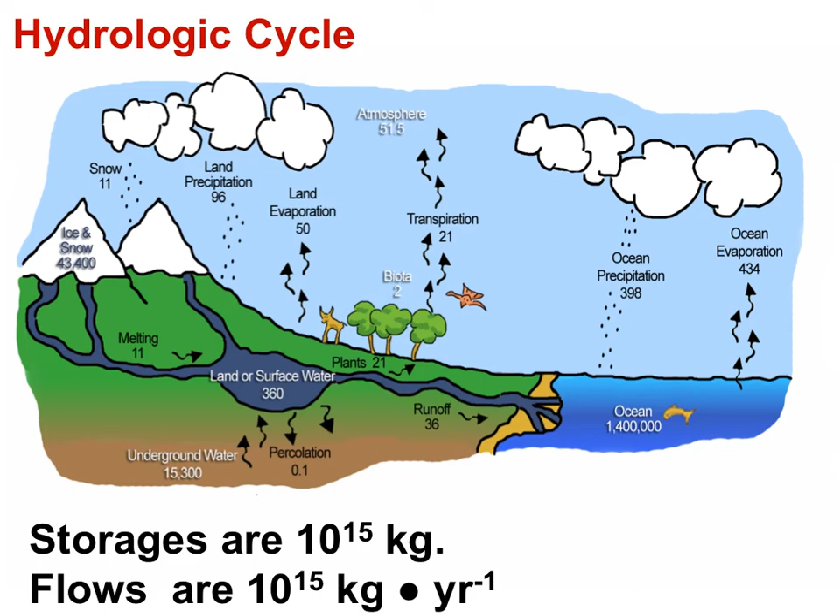All the fresh water that was available to humans 10,000 years ago is still here with us today. So why is it that fresh water feels scarce? Why would societies need to strengthen freshwater supplies? Population numbers have increased, putting stress on existing freshwater storages, especially in desert regions. As well, people have polluted most of the existing surface water storages. So here is the IB syllabus statement that drives this movie start to finish: describe and evaluate water enhancement measures that provide for increasing demand for fresh water.

China has numerous water redistribution plans from the wet southwest to the dry northeast, from places with higher water availability to regions of lower water availability. In this slide, you can see the Yellow and the Yangtze rivers in blue, and the redistribution projects in red. These projects are very expensive.

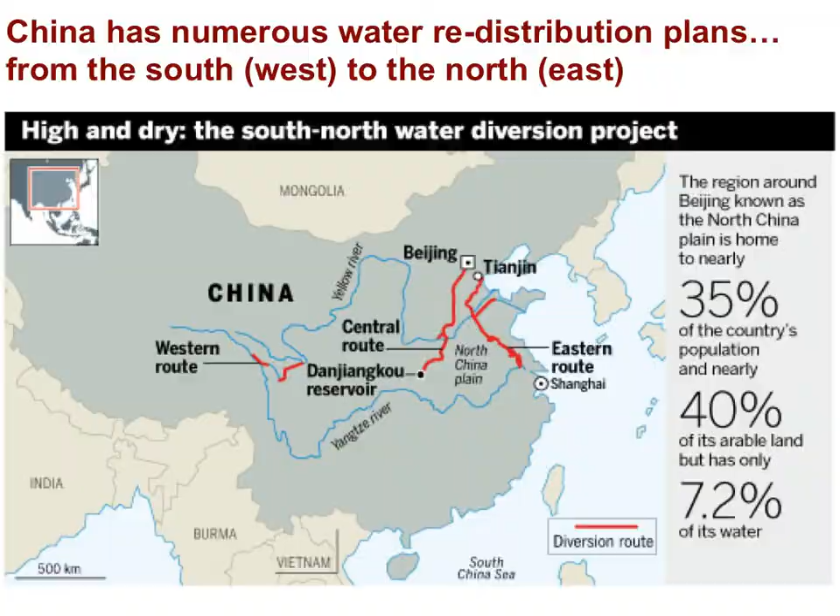China would like to redistribute water from the Brahmaputra River on the Tibetan Plateau to northern China on the Yellow River, a much drier region. A project like this requires technological expertise in addition to the expense.

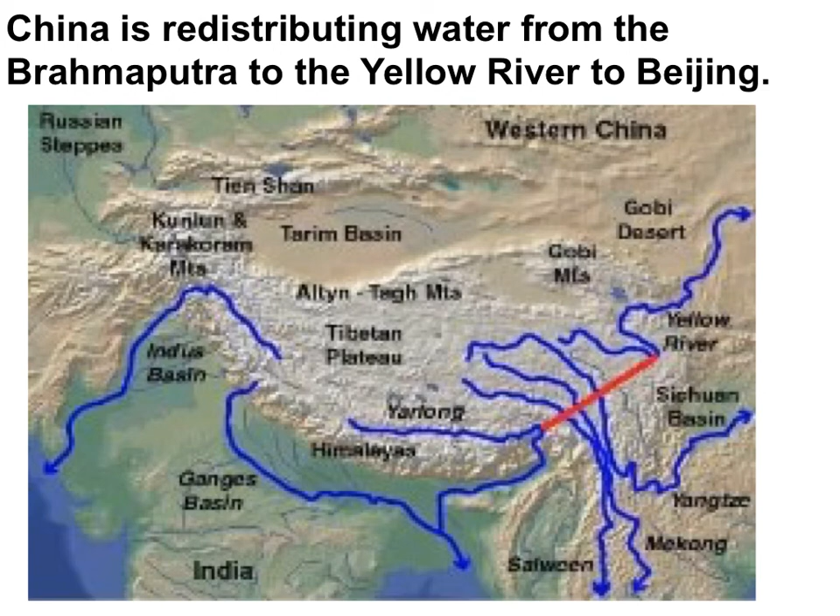Canals redistribute water from the Colorado River to arid cities such as Phoenix. The withdrawal of water from the Colorado changes the magnitude of the Colorado River as a storage, and it also changes the biodiversity of the river.

Now, can you evaluate the redistribution of water as a strategy to enhance water supplies for people? Stop the movie now or follow along with me. I've stated the strengths and weaknesses in previous slides. I'll let you study this slide on your own, although I'll quickly run through it. Stop the movie to take some notes.

The strength of redistribution is that it moves water from places with an excess to places with a deficit of fresh water. Weaknesses: it's expensive, requires specific technology, there is a loss of water due to evaporation from the surface of the canals, and there are changes in the ecology of the river. There's a loss of diversity.

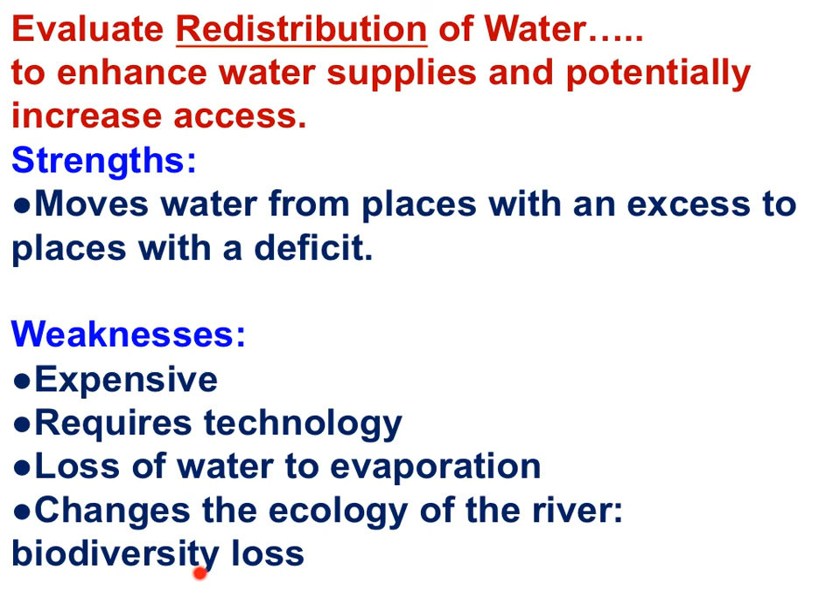Now, let's look at reservoirs as an enhancement measure providing for the increased demand for fresh water. Urbanization and the increased need for agricultural irrigation has increased the demand for water. Dams hold back large volumes of water for irrigation and household use. Dams are expensive to build, and the ecology of the original river is dramatically changed.

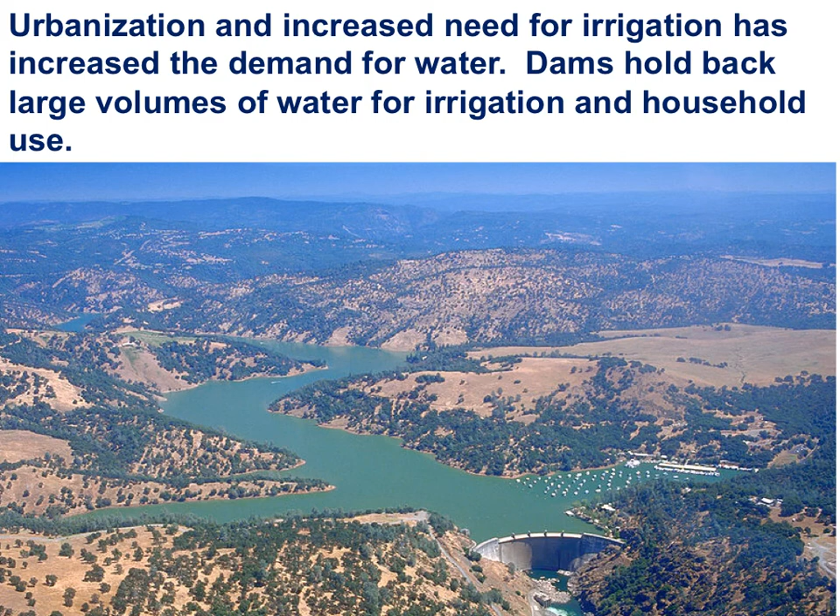Dams do provide water for people who need it, but dams also provide electricity, also known as hydropower. When the Three Gorges Dam was built, more than 1 million people were displaced from the river valley.

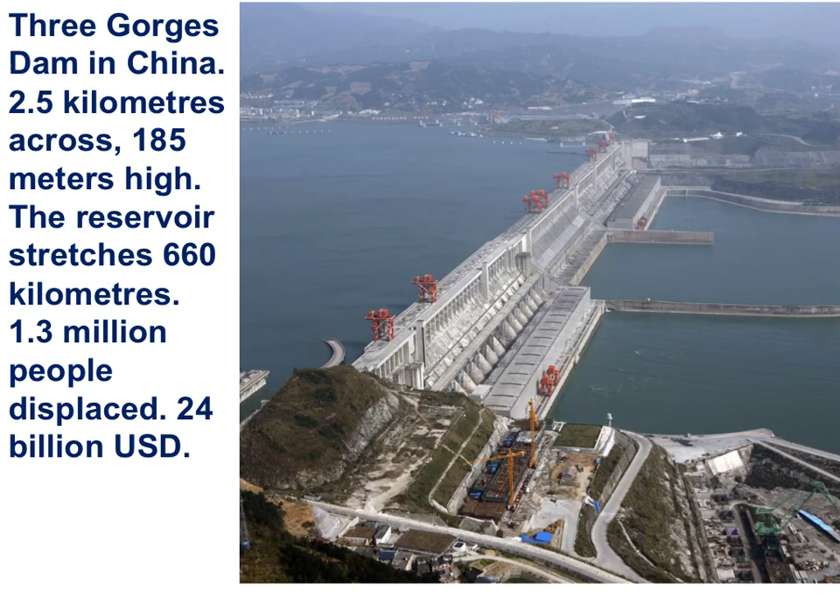Dams hold water back for household use and agricultural irrigation. Dams also provide hydropower, and the lake behind the dam provides recreational opportunities. Dams are expensive to build, and they have a finite lifetime. Silt fills in behind the dam, and the water held behind the dam is not endless. If the river ceased flowing, the water held in its reservoirs would last 3 to 4 years only.

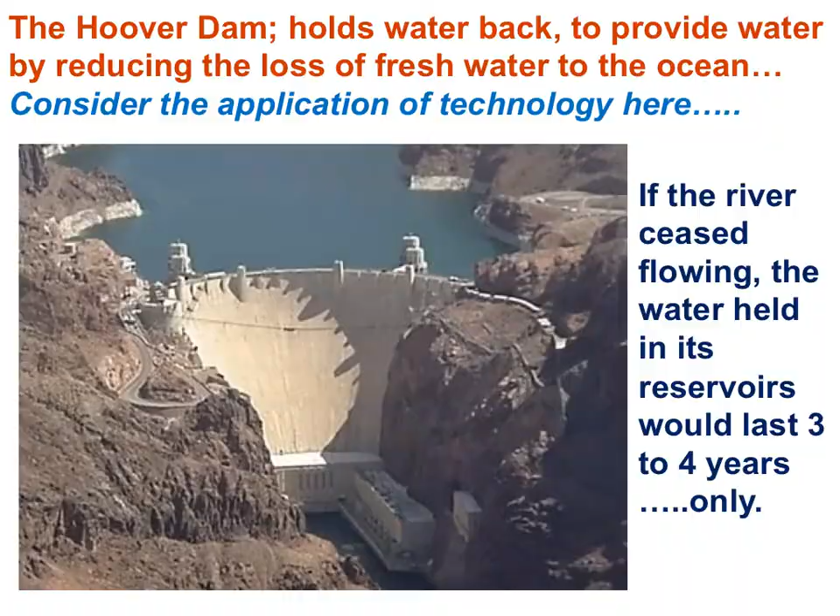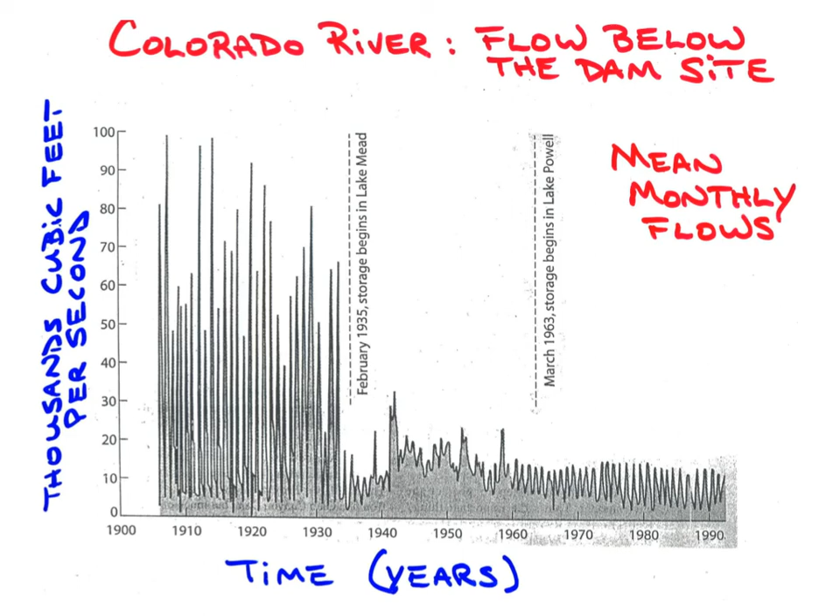In this graph of flow volume in the Colorado River over time, you can see that the flow rate varied widely before the Hoover Dam was built in the early 1930s. Once the dam was built, flows downstream were quite regular. Dams reduce the probability of flooding downstream and make the water flow quite predictable.

Desalination plants are expensive and require high technological expertise. Desalination plants must be located near an ocean.

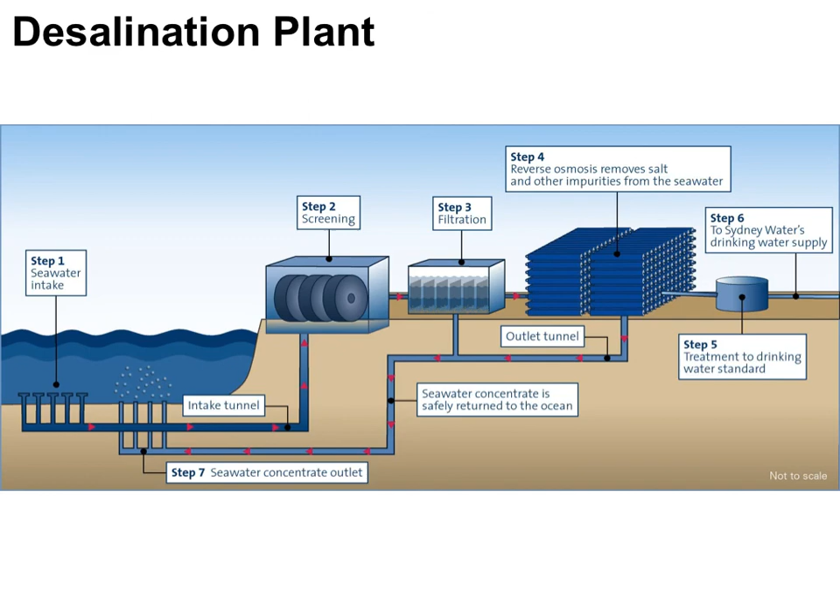Desalination plants are expensive to operate, requiring high quantities of fossil fuel to distill the fresh water from the salt.

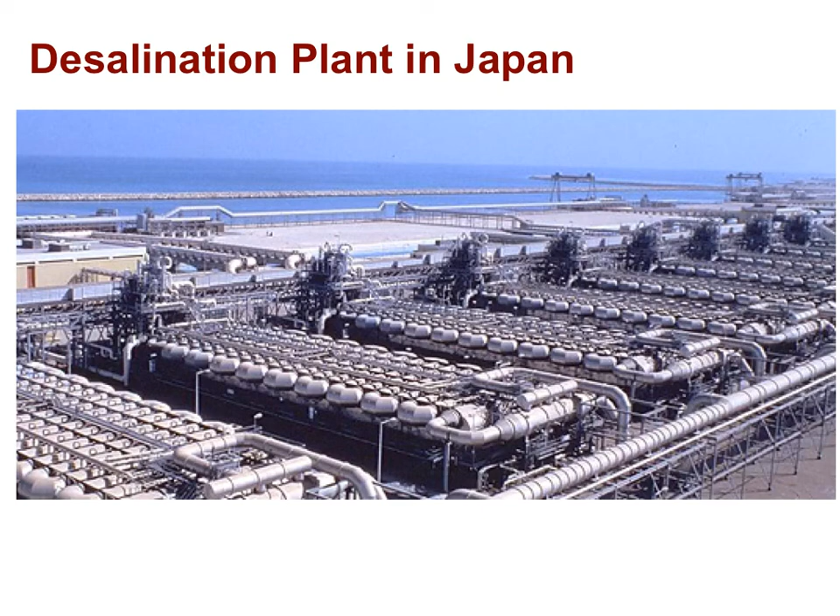Can you evaluate the desalination of water as a strategy to enhance water supplies for people? Stop the movie now or follow along with me.

I've stated the strengths and weaknesses in the previous slides. I'll let you study this slide on your own. Stop the movie to take some notes.

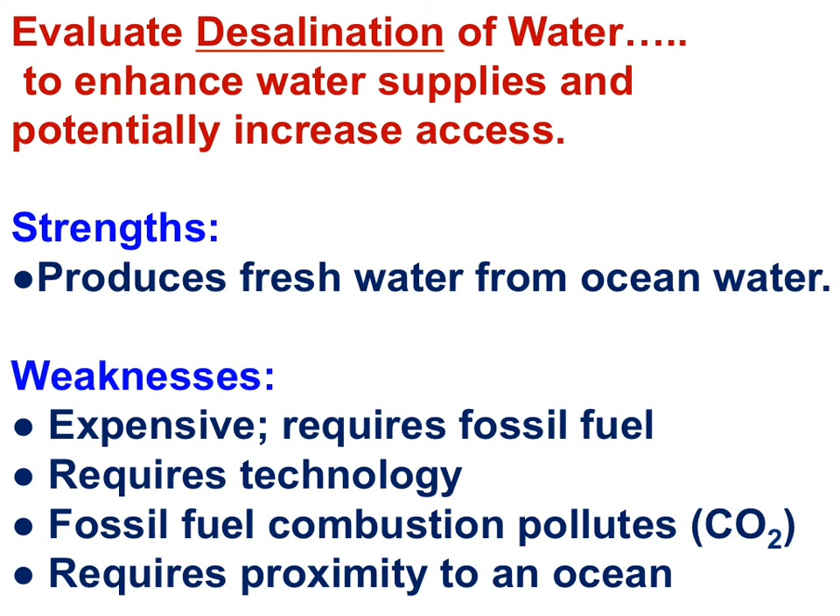Now let's look at the artificial recharge of aquifers as an enhancement measure providing for the increased demand for fresh water. The artificial recharge of groundwater aquifers is the process of purposefully moving water to underground storages. This is a process of recharging groundwater storages by injecting water into the storages in the ground. This would help maintain groundwater natural capital.

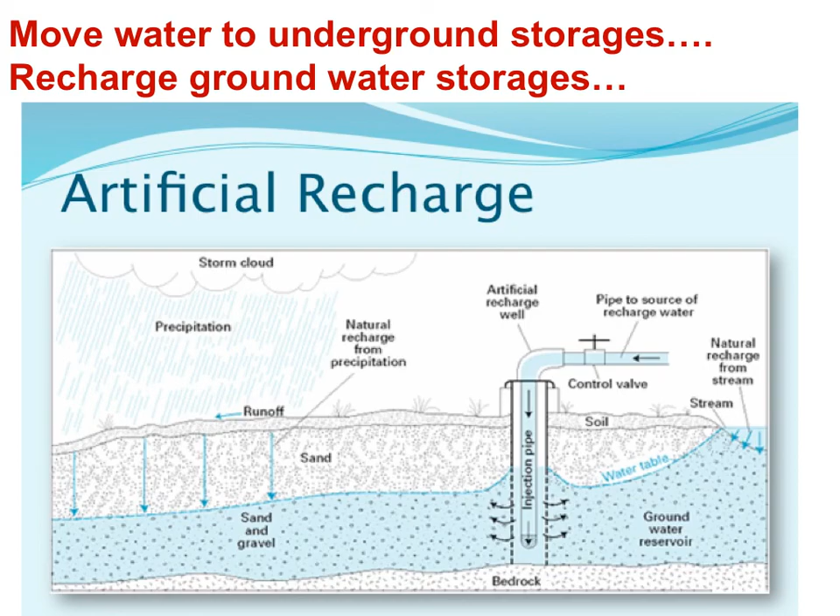Groundwater recharge is a process where water moves downward from the surface into groundwater. Recharge is the primary method through which water enters an aquifer. The recharge occurs both naturally, through infiltration and percolation as part of the water cycle, and through anthropogenic processes known as artificial groundwater recharge, where rainwater and/or reclaimed water is injected into the ground.

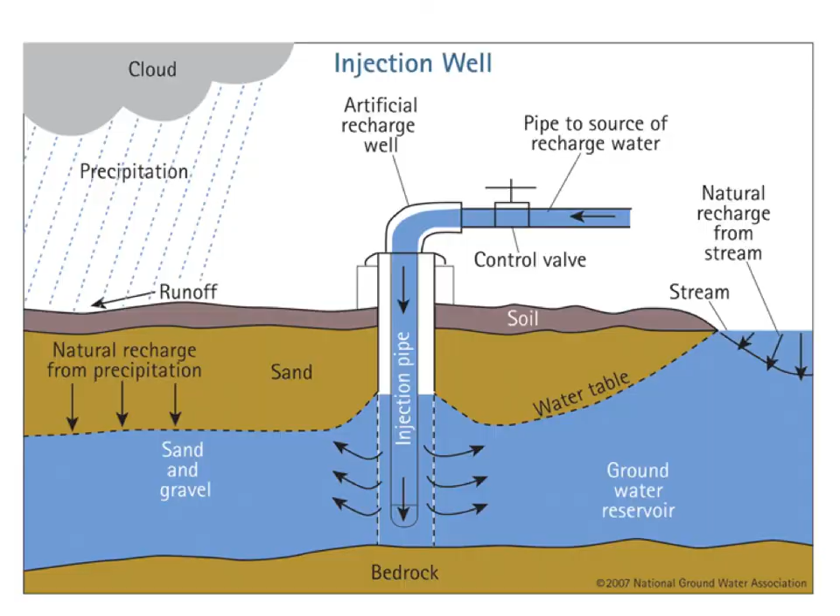Groundwater recharge often requires technology in the form of tubes, pumps, and tanks, and this could be expensive. Groundwater recharge requires land area, as you can see in this image, for taking up the water and letting it percolate into the aquifer. But the solution is really potentially a low-tech solution, nothing more than land area that allows for the percolation of rainwater into the aquifer.

The question is, is the recharge input equal to the output, the use? Where is the source of the recharge water? Is there enough recharge water to make a difference in groundwater levels?

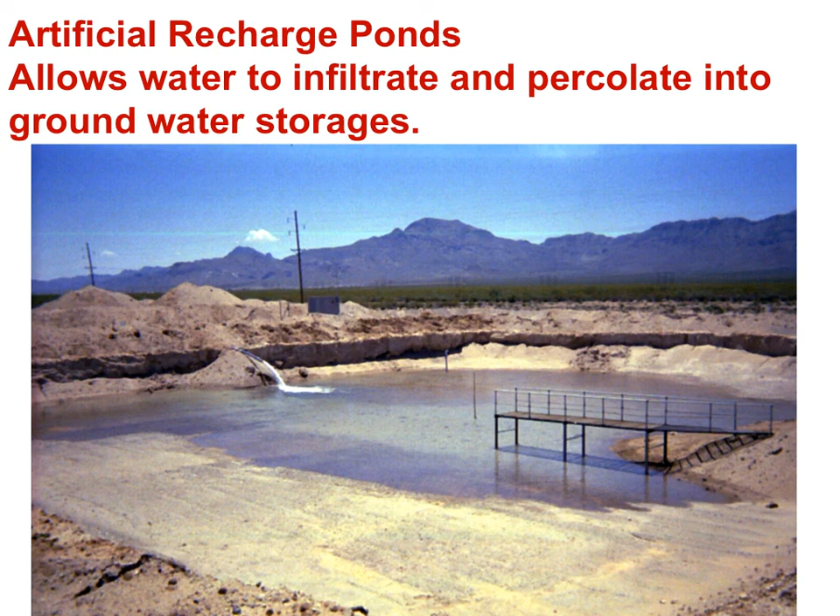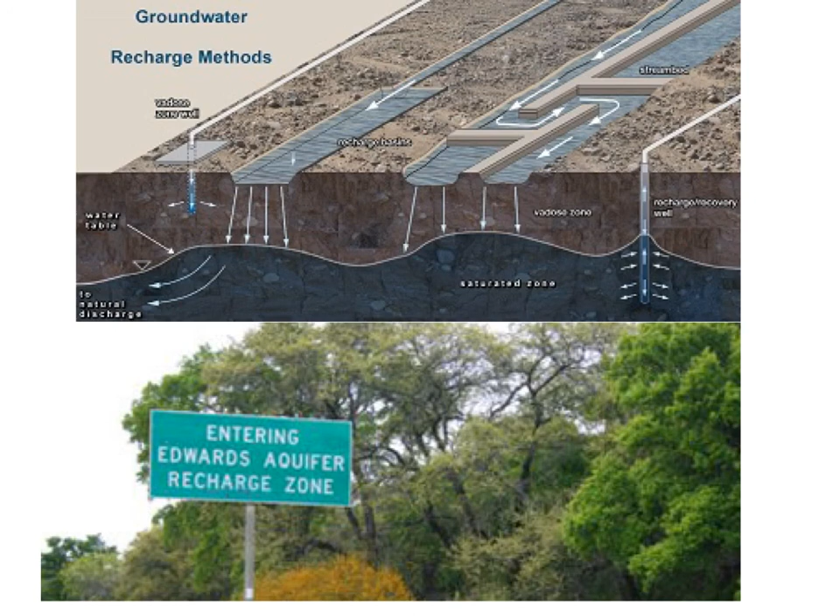You can see in the upper image the role of technology in groundwater recharge, and you can see the significant surface areas that are required for artificial groundwater recharge.

Can you evaluate the artificial groundwater recharge as a strategy to enhance water supplies for people? Stop the movie now or follow along with me.

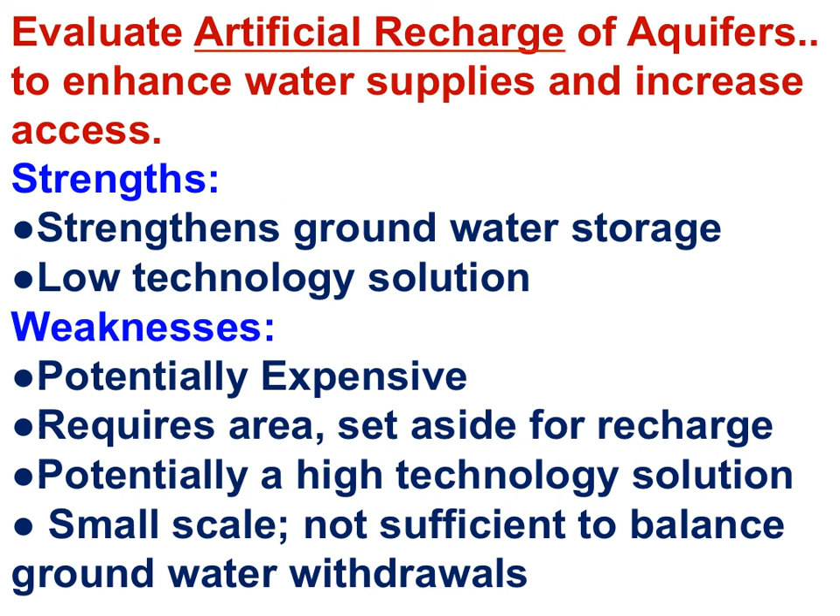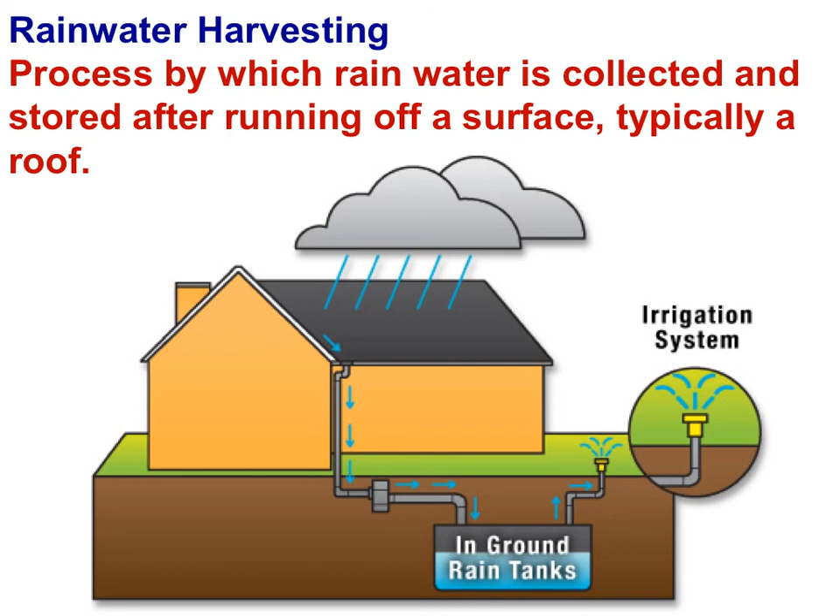Now let's look at rainwater harvesting as an enhancement measure providing for the increased demand for fresh water. Rainwater harvesting is a process by which rainwater is collected and stored after running off of a surface, typically a roof.

Rainwater harvesting tends to be a small-scale, low-technology, inexpensive solution to water access. The water collected by rainwater harvesting can supplement the water provided by the government or the local well. One question is, is the collected water safe to drink?

The technology involved in the collection process of rainwater can be more sophisticated than one might imagine. Is the input sufficient to meet the demand? Does the input vary seasonally?

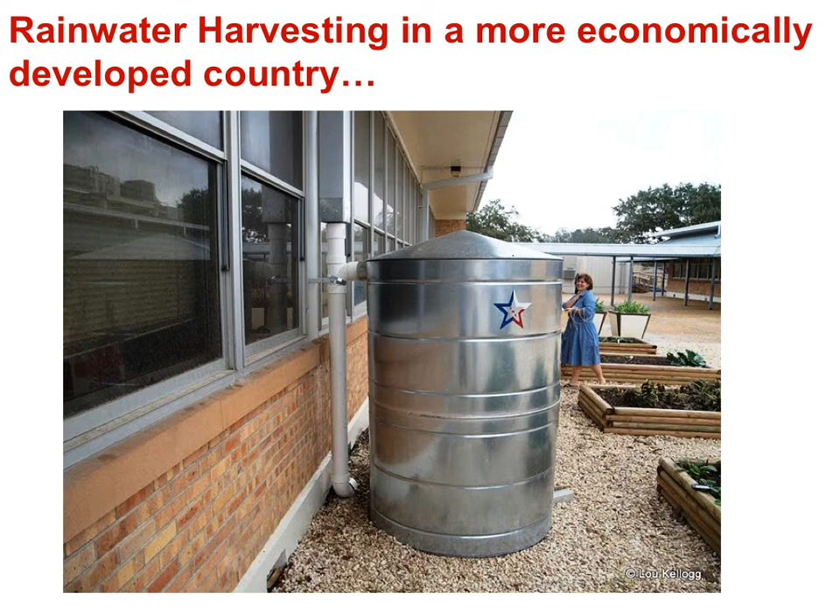Rainwater harvesting is a small-scale, low-technology, inexpensive solution to provide fresh water, to supplement the fresh water that a family might have. Is the input sufficient to meet the demand? And does the input vary seasonally?

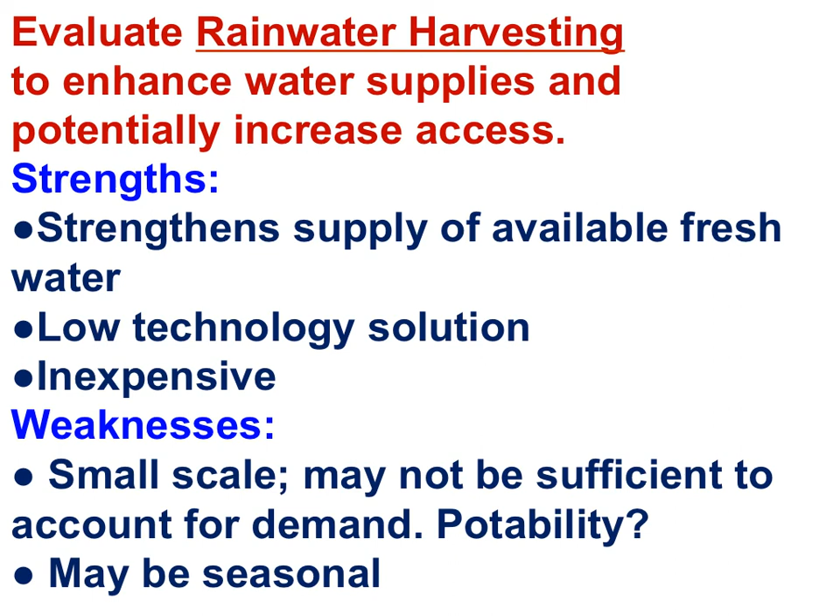I've stated the strengths and weaknesses of rainwater harvesting in the previous slides. I'll let you study this slide on your own. Stop the movie to take some notes.

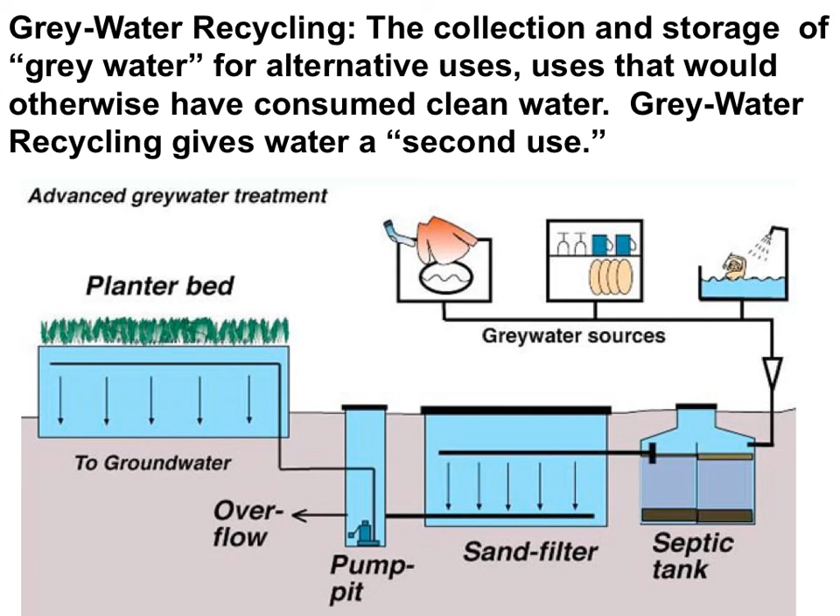Let's look at gray water recycling as an enhancement measure to meet increased demand for fresh water. Gray water is water that is not fully clean, having been used for washing clothes, dishes, or bodies. It can be stored, filtered, and reused, for example in this planter bed. Gray water recycling is the collection and storage of gray water for alternative uses that would otherwise consume clean water, giving it a second use.

Gray water is water that has already been used for washing clothes, dishes, or bodies. Gray water recycling is a low-tech, inexpensive solution to collecting and storing gray water, giving it a second use, for example in this planter.

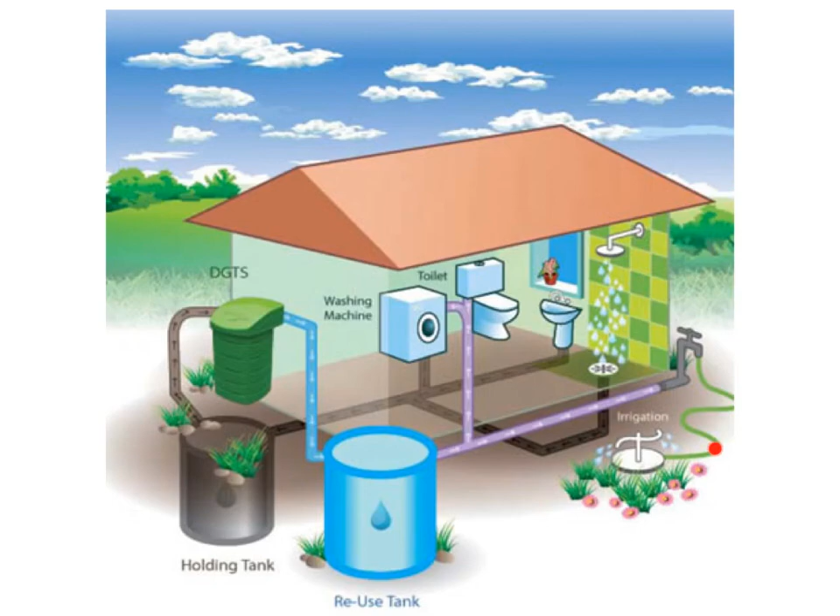Gray water recycling can involve sophisticated technology to ensure collection of wastewater from the home, but it doesn't have to be as sophisticated or expensive as this image implies. Moving polluted water through a sophisticated tank with microbes and sand or gravel beds can clean the water, and this kind of technology can be used with gray water.

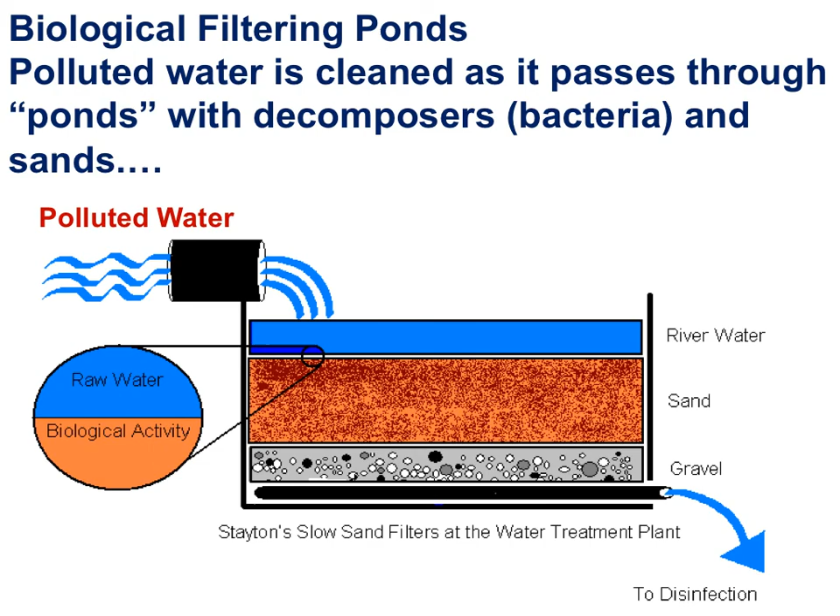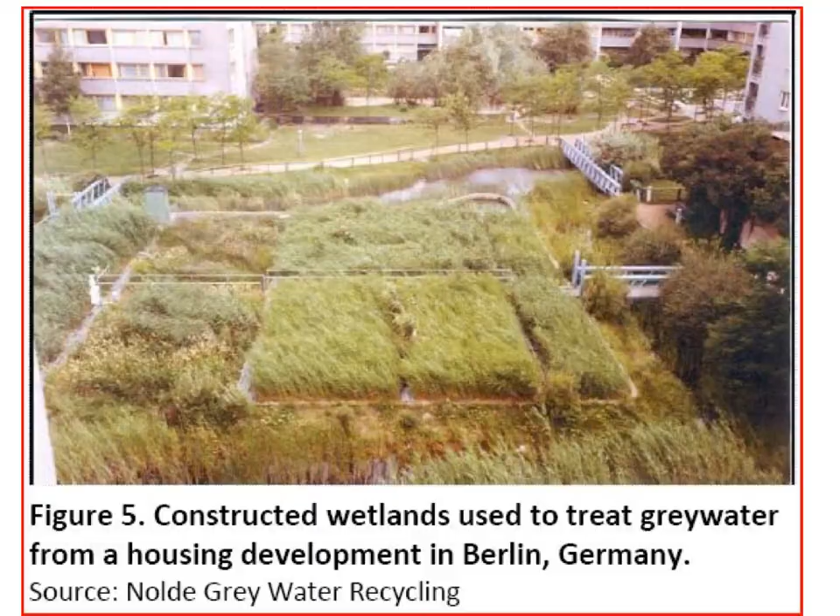These artificial wetlands with plants, microbes, and sand clean gray water. These biological filtering ponds clean polluted water as it passes through, using decomposers, bacteria, plants, and sand or gravel beds. Gray water can be passed through beds like this to clean it.

Recycled water supplements available supplies. Water, once used, is collected, stored, and used again, but it might not be drinkable.

Now let's look at how changing behaviors is a viable solution to enhancing the supply of water. Could societies be more sensible, sensitive, and aware in polluting water less? Could we choose to pollute less? People use the flow of rivers as a means to get rid of waste from their immediate environment, and as a result, most surface water storages are not drinkable.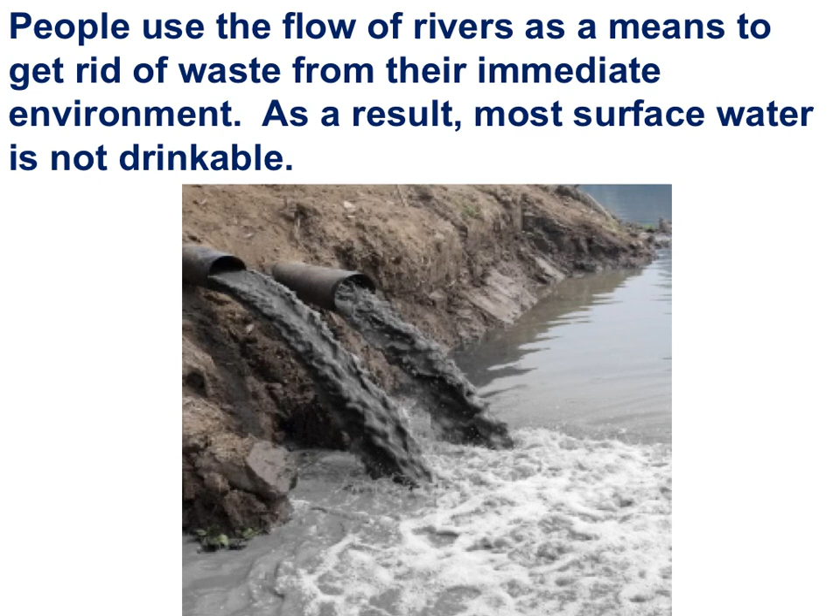Could societies change their behavior as a mechanism to enhance available supplies? How do we treat our surface water, and what does it cost society to clean it? Could we simply choose to pollute less? What are our behaviors with respect to water use? Do some of us use too much, more than our fair share? Could each of us use less water to enhance available supply?

Do societies need to irrigate golf courses? How could we enhance available freshwater supplies? How much water is used when we flush the toilet or wash our clothes? Do some of us use too much water, more than our fair share? How could we enhance available freshwater supplies?

Irrigation flooding consumes a lot of water. Is there a way to irrigate with less water? Agriculture is the most water-consumptive human activity there is. Irrigation that uses surface and groundwater dramatically redistributes water, reducing surface and groundwater storages and increasing evaporation.

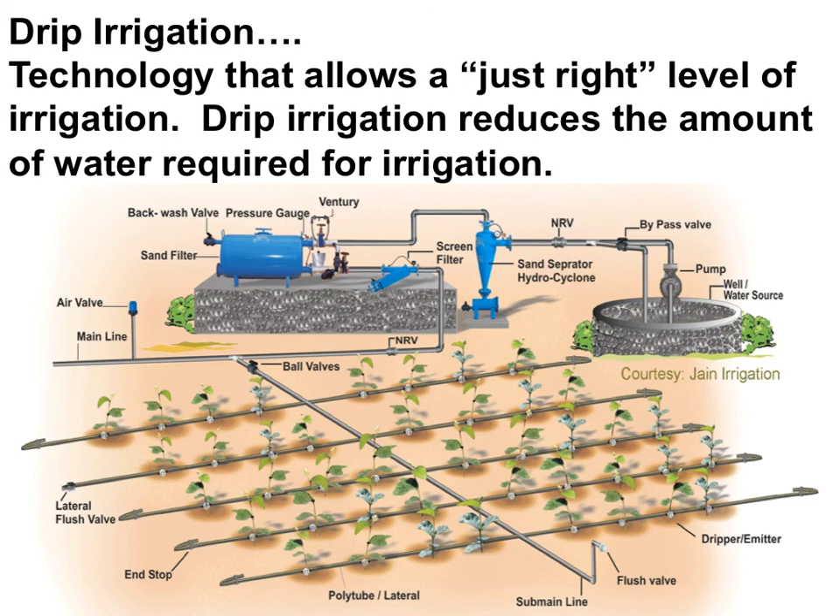Could societies use a technology known as drip irrigation? Drip irrigation allows just the right level of water to reach the plants, reducing the amount of water required for irrigation and reducing the amount lost to evaporation from agricultural fields.

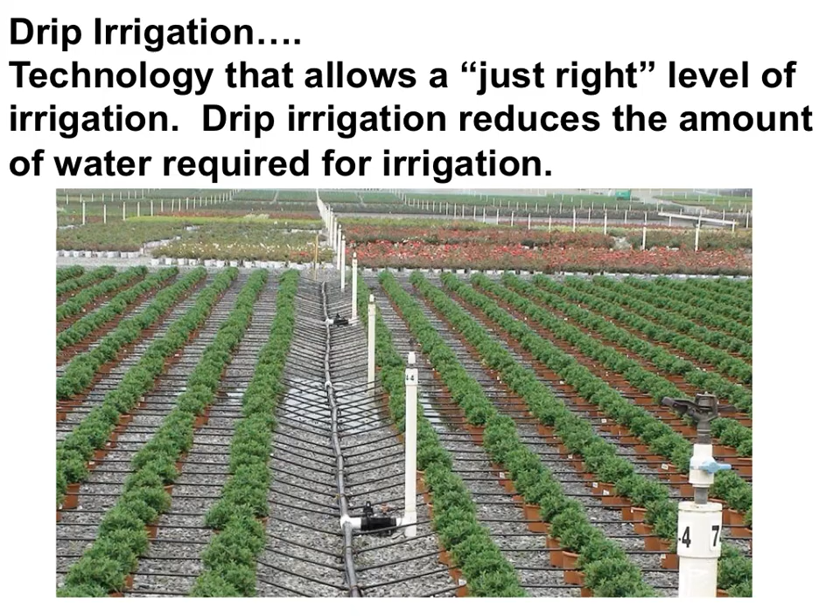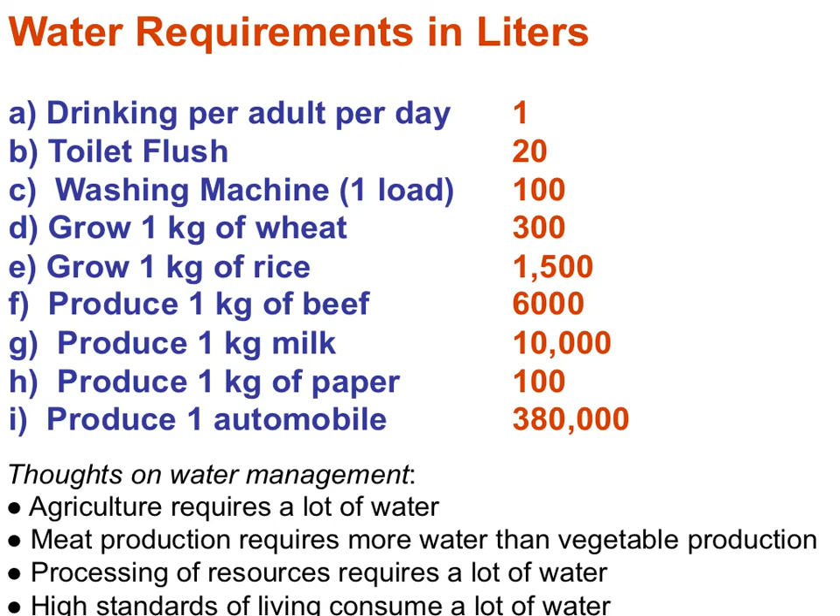How could we change our behavior to strengthen access to water? And that brings us to the end of IB ESS, Water and Aquatic Food Production, Part 5.